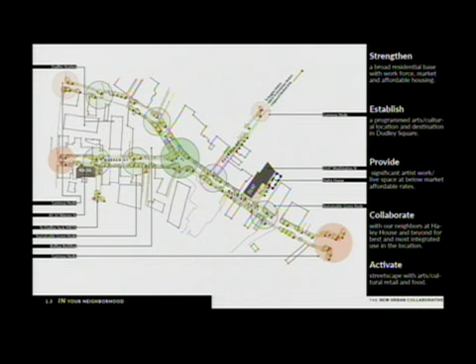On the site, between the Palladio building, which is here, and 40-50, there's actually a gap between the buildings that we're pulling back away from Palladio, specifically so that we can activate a space, and I'll talk more about that as I get deeper into the presentation.

Again, this is another instance where we're trying to mass the building with sensitivity to what's around it. You'll notice that the Palladio building is a certain height. We're mandating that the base of our building, which contains the office and workspaces and also the retail ground floor spaces, be consistent with what the Palladio building is setting up to the corner. We're situating the residential block of our building, which is a 3-story cube on top, back and away from both of the streets so that there's a clear datum that reads in the neighborhood as consistent with the historic fabric of Dudley Square.

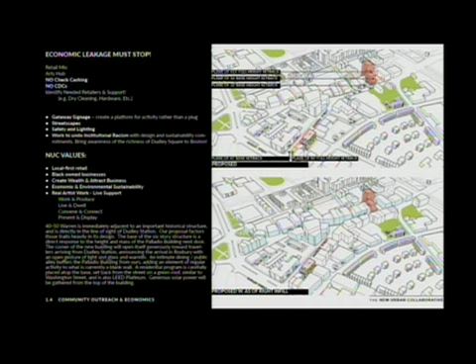Once again, our neighborhood plan involves the activation of three key gateways across the site and then a number of green nodes throughout, in particular the one here at the Palladio building where the roads diverge from one another.

Specific to the 40-50 building, the corner that it sits on, as well as the corner between this building that we're in now and Dudley Station, are very important moments that we feel we will spend a lot of energy and effort enhancing and making more safe, again, to provide that sense of safety and neighborhood ownership that will allow businesses to flourish.

One of the things we heard when we attended different meetings, but in particular one Black Market meeting, was that residents in the area don't particularly feel able to engage with the businesses that are here currently, and it's a big reason why things that are here now don't stick around very long. We're hoping that by really addressing the street in an aggressive and intensive way, we can set up a situation where retail, office, and arts programming is allowed to really thrive.

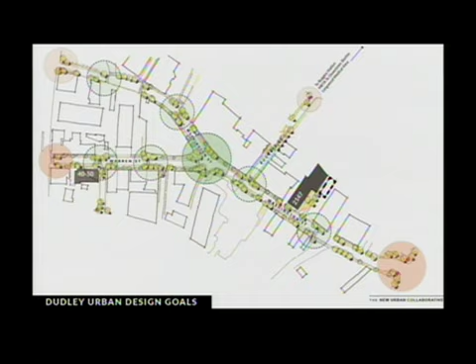So moving into the building, we've seen all this already in the last presentation.

Again, the massing of the building sets the residential piece back and away from the street. We're imagining a retail and restaurant base to the building that features local first engagement.

We are imagining a carved away corner on both edges of the building that engages with the view corridors around it, as well as on this corner an entry space into the two floors on floors 2 and 3 that contain office and business incubation spaces and co-working spaces. That will come down to the ground level and meet the ground on that corner, and it will be surrounded by retail programming.

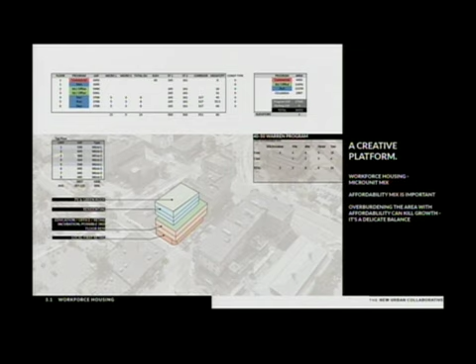I mentioned earlier how we're addressing the Palladio building side of our new building, specifically at the ground. We are pulling back from the Palladio building in order to allow an entrance into the residential lobby to go up to floors 4 through 6.

What that affords us is a way of activating this alley space, which is currently there, and it's currently occupied by garbage cans and other things that aren't so nice, with 24/7 street level activation of people coming in and out of their residences.

To reinforce that, we're suggesting an art wall and a backstop to the space that will be programmed by the community and by the various arts organizations that we're engaging at 2147 and in this building.

And finally, a restaurant or cafe space on the corner here, which can spill out into that space, both on the sidewalk and in the alleyway, to reinforce the activity that happens there, providing a lot of light, a lot of transparency, eyes on the street at all hours of the day, so that this building really addresses those problems that I mentioned earlier.

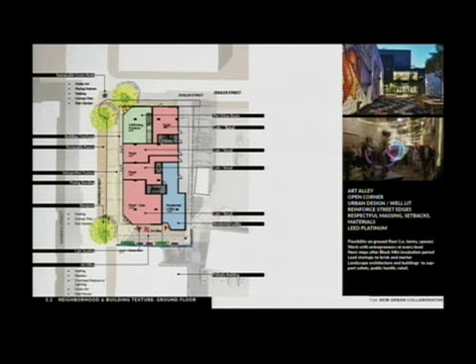Once again, we have the co-working entrance on the corner facing Dudley Square, leading up into two floors of programming specifically involving co-working spaces, incubation, and other types of retail generators and business generators.

Again, we have this concept on the 2nd floor of there being a kind of urban room that we imagine being a living room for these incubation and co-working spaces, but also a space that provides an iconic vision of the building to the Dudley Square transit stop, and also a kind of monumental space right on the street.

Once again, this is a double height space. We're planning on bringing the materiality of the building on the exterior down into this space so that we connect the podium level of the building with the levels of the building above, which you can see in this view standing in Dudley Square looking toward the corner.

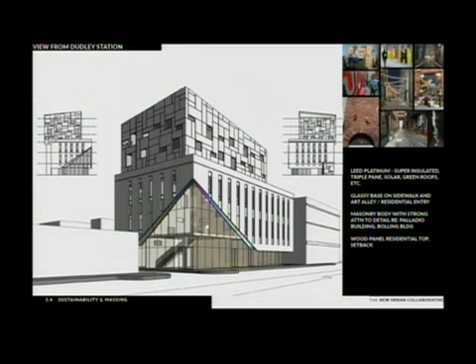There's that entrance into the co-working space, up into that living room space that I mentioned, with the material qualities and the window pattern from above coming down into the space. A masonry body to the building consistent with the Palladio building in type as well as in mass. And then once again, an active retail edge along the street.

One important point worth mentioning of both this building and 2147, but especially important to this one, is the notion of being LEED Platinum. The reason we decided to go beyond what the RFP required, the RFP required LEED Silver for both buildings. We contemplated going LEED Gold, but as we looked at the LEED situation and what it actually sets up, we came to a realization pretty quickly that LEED Platinum would allow us to provide a dramatically lower operating cost to the residential units above and beyond LEED Gold, which is kind of a break-even point.

So our decision to go LEED Platinum isn't just a move that we made because LEED Platinum sounds great. It's something that we really feel adds value to the building and brings the opportunity for the micro units that are in that living space to be actually affordable as an operating principle.